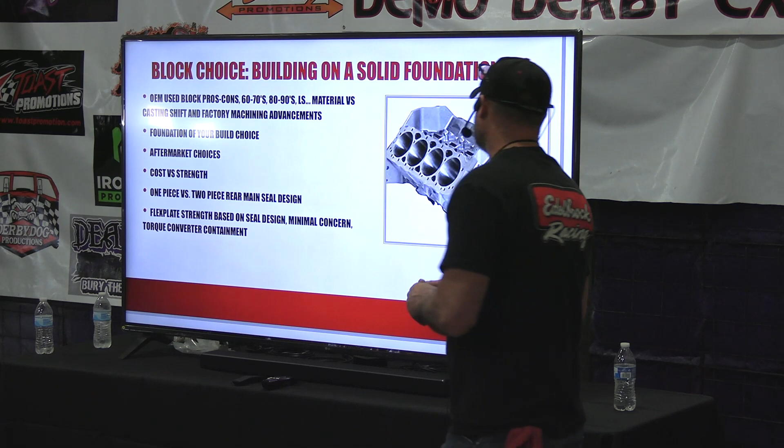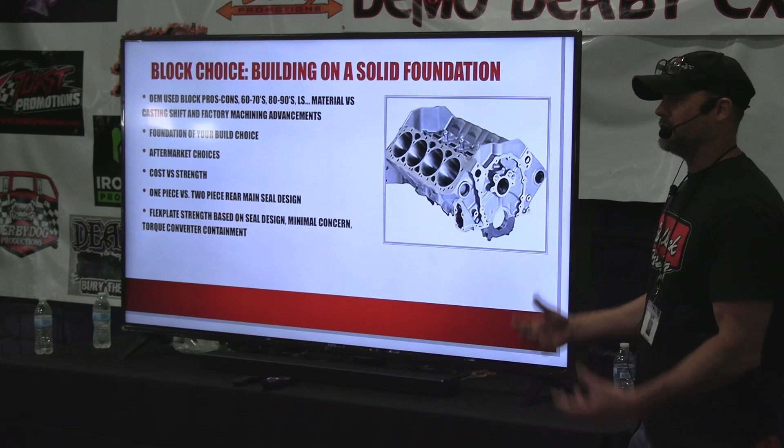When it comes time to build an engine, the block is going to be the foundation of everything. I hate to see a customer come to me with a very big idea of what they want to build, and then we put it all together with a block that's only worth about 50 cents. You built this enormous, beautiful house on the beach, and it's just going to wash away.

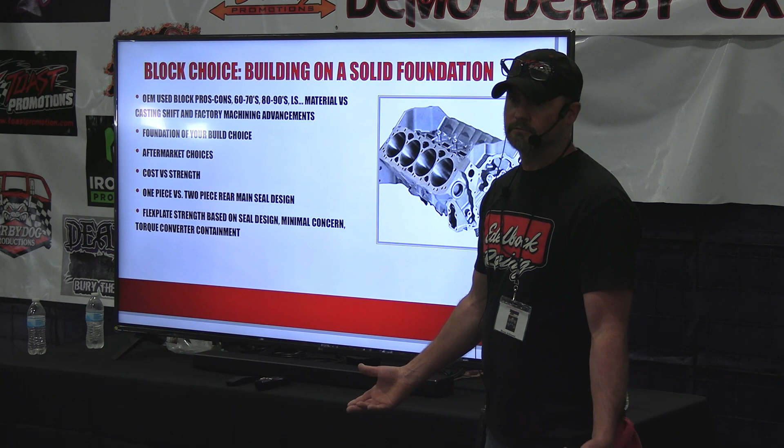So our choices on blocks, especially the OEM stuff, I want to start there. We've all heard the old iron's better—high nickel content, this, that, and the other. The reality is the 60s and 70s era blocks are definitely a denser and stronger material. There was some better material out there. They were seasoned, as they like to call it.

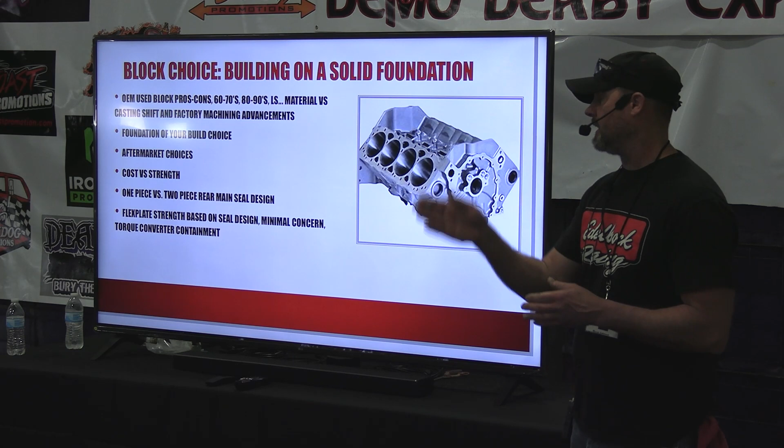The downside of those blocks is back then the technology for machining that material wasn't very good. So you can scour the salvage yards and find yourself that golden 010 block, but if you look down the cam tunnel, the core shift is horrible. So now we've got a block with really good material, but one side's considerably thicker than the other. Do we really want to start with that? Probably not. The machining back then just wasn't that great.

Now jumping into the 80s and 90s era—80s right-hand dipstick, 2-piece rear main seal blocks were absolutely horrible. That time frame, materials were very scarce. We were going through a weird economical switch, there wasn't a lot of money out there, manufacturing was much less. So the cast iron quality of those blocks is not very good at all, and the machining technology for that poor material still wasn't up to standard. Those blocks primarily will break much easier—they're very brittle. Now as we keep going into the 90s, things started to change a little bit.

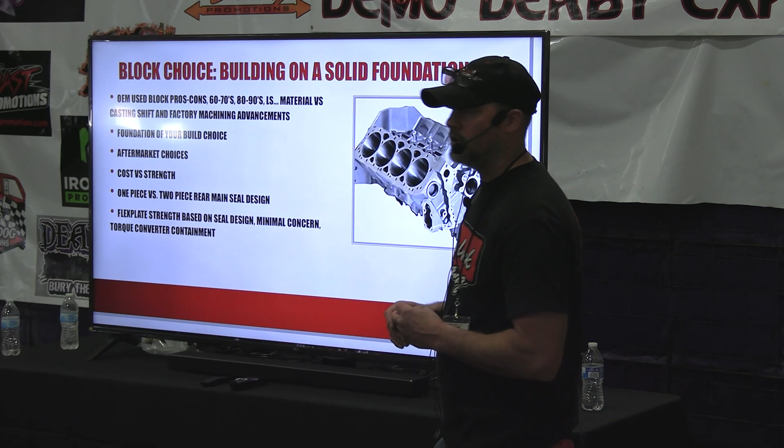So we jump into the 880 Vortec style blocks, the 638s, throttle body stuff, single piece rear main seal. If you take one of those blocks, the cast iron material is not as thick and strong. However, the machining process is by far better. If you take an 880 block and set it right next to an 010 cast iron block, you can visually see how much better the core shift is, how much more consistent the block is. The machining is just that much better because technology grew.

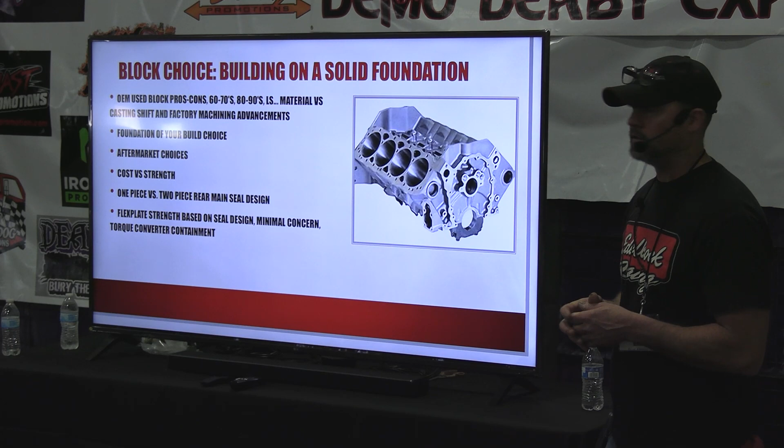Now, as that technology grew, manufacturers realized we're getting so good at building and machining these that we don't need to make them as thick or as strong. So that's the spin-off of the blocks, okay? The LS stuff—everybody's jumping on that. That's actually an absolutely fantastic package. The LS engines are really good, and their cast iron quality is about the same as what we're dealing with in the Vortec style stuff. Obviously, their weakness is the brittleness of the cylinders. So it's six of one, half a dozen of another.

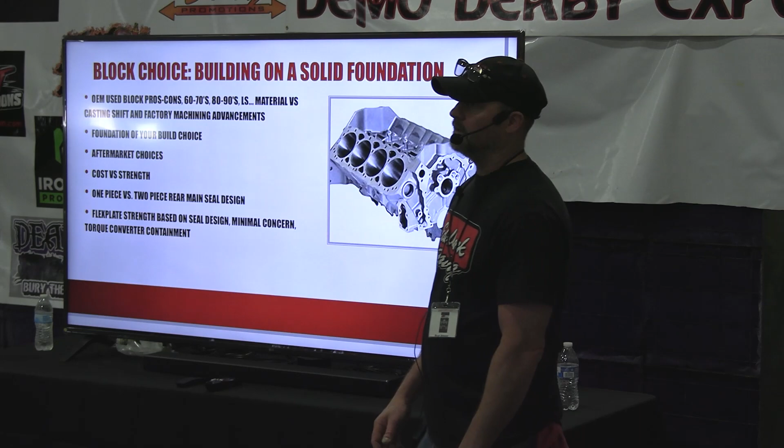Aftermarket stuff—the aftermarket world is huge with blocks right now, not just domestic, but there's a lot of China stuff coming over. The reality is the China stuff's actually pretty good. As much as I hate to say that, it's true. There's some manufacturing going on that's 100% mimicking a Dart SHP block with priority main oiling. The material seems to be very good, and the machining quality seems to be very good.

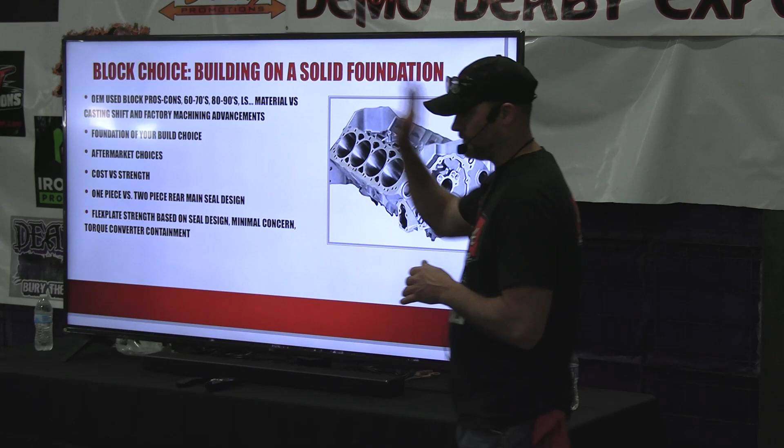I found a dealer located far out west, a very big warehouse I deal with, and the rep I typically talk to mentioned they had gotten a very large order of these Chinese blocks in—would I be interested? So I said, you know what, Tom, here's what we're going to do. Send me two of them. I don't know that I'm going to use them, but send me some.

I wanted to see, because if I buy just one, it might be easy enough for the guy to walk out in the warehouse and say that one looks to be the best. So I figured if he sends me two, at least I had two to compare. And the reality is it's actually pretty good stuff.

Dart and World are the two biggest ones as far as block strength. They are absolutely thicker in the deck, thicker in the cylinder bores, just stronger all around. The block itself is physically heavier. An average Dart block is right around 220 pounds, which is a lot for a bare block.

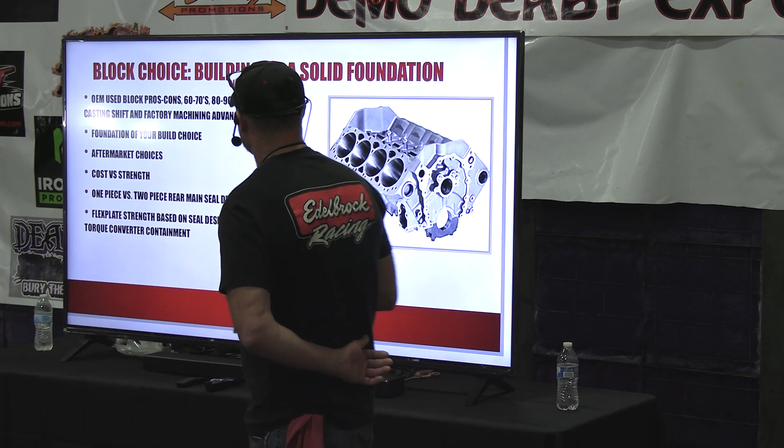Okay, the one-piece versus a two-piece rear main seal. I've had that question a lot with my guys. Really, in the block itself there's no big difference. But there is one small difference when it comes to a two-piece rear main design versus a single, and that is the strength of your flex plate.

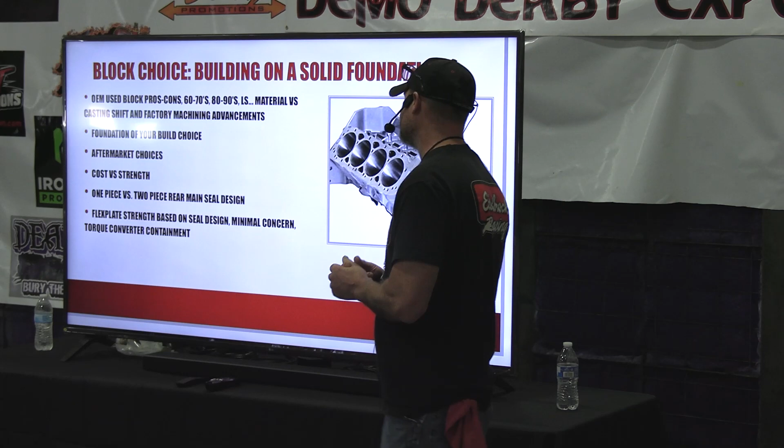I stress hardcore on that flex plate, because time and time again you're beating the front pump out of your transmission. Well, there's a reason for that. To contain your torque converter and hold it, it has to be seated against the crankshaft. The flex plate's the only thing that does that for you. That's why it's called a flex plate, it's just a big spring. So every time you back up and hit, the only thing holding that torque converter from slamming into the front pump on the transmission is that flex plate.

The one-piece or single-piece design crankshafts have a considerably smaller bolt flange. If any of you guys have run both designs before, you'll notice that. Being that flange diameter is smaller, that flex plate is slightly weaker than the older two-piece design. But other than that, in the blocks there's not really anything.

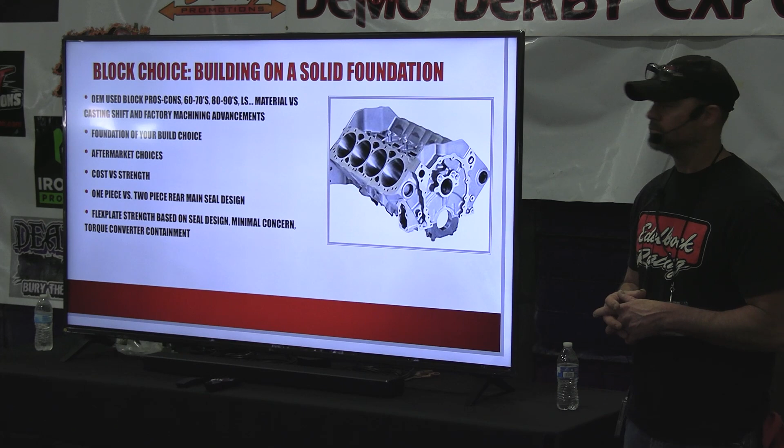Okay, all right, does size really matter? Everybody wants to build strokers, everybody says 'I want the biggest and baddest,' and when they show up, this thing's just going to tear everybody in half.

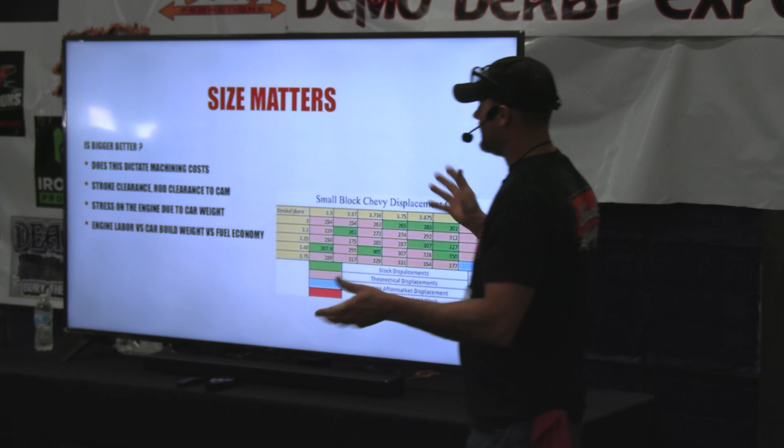There is actually some thought process to the size of your engines, and the big thing is it comes down to the weight and size of your build. If you're going to go build yourself a 9,000 pound car and then decide you're going to run 302 cubic inches, you can put all the gear to it in the world that you want, but the engine is going to labor. It is going to struggle to move that much weight.

You guys don't have race cars, but you do kind of have a drag car. You need to have that 10-foot shot, because that's about all you get most commonly. So you need to move the maximum amount of weight, which is your car, the fastest you can move it in 10 feet, to put on as much damage to that guy as possible.

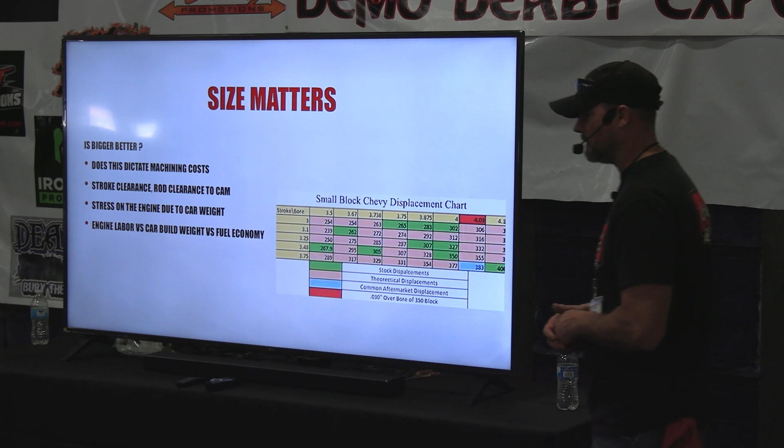So I always try to tell my folks that the size of the engine is going to be determined by what you build. My very first question with any new customer is, what kind of shows do you normally run, and what kind of car do you normally build? Are we talking a 4,000 pound car, or are we talking that 9,000 pound car? Because that's going to make a difference as far as what direction we want to go.

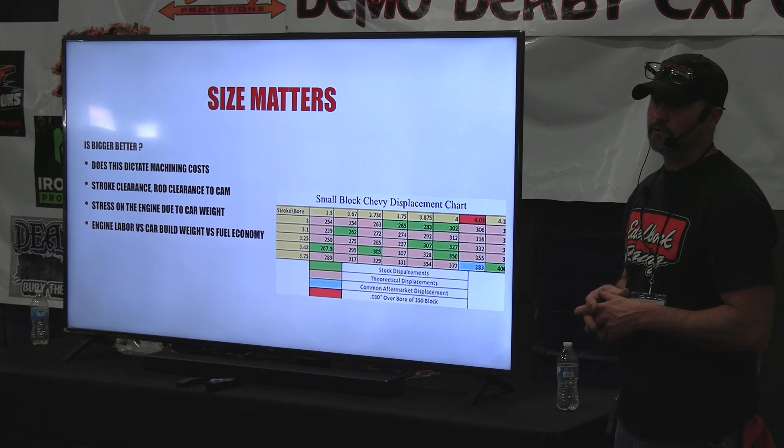Obviously, the more cubic inch we put in that car, the easier it's going to be on the engine as far as labor and stress, but it's also going to be able to move that much weight in a short distance. As far as machining costs, of course there is. Anytime we're going to go bigger on cubic inch, especially stroking an engine, there are machining costs. There's a lot that has to be done to the block for the rods to swing through, and a lot of work needed on the rods themselves in order for the camshaft to fit.

I think I covered the car weight. Okay, yeah, let's just go to the next slide.

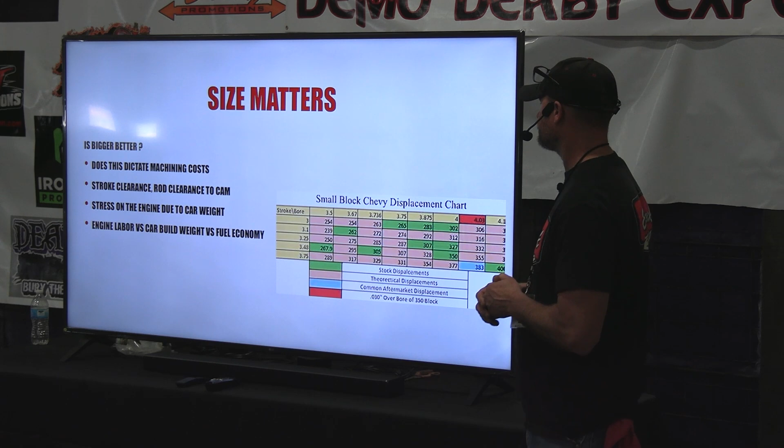All right, keeping it all together. I get this a lot too — steel crankshafts, cast crankshafts. For the most part in the Derby world, you guys do turn RPM. That's absolutely true, but you also only turn RPM in a very short burst.

Even a drag car turning an 8-second quarter mile turns a lot of RPM for 8 seconds. You guys too can turn a lot of RPM for, let's say, 5 to 8 seconds most commonly. So materials of our rotating assembly — we got steel and we got cast crankshafts, and then we have this voodoo stuff called nodular iron, which is still cast.

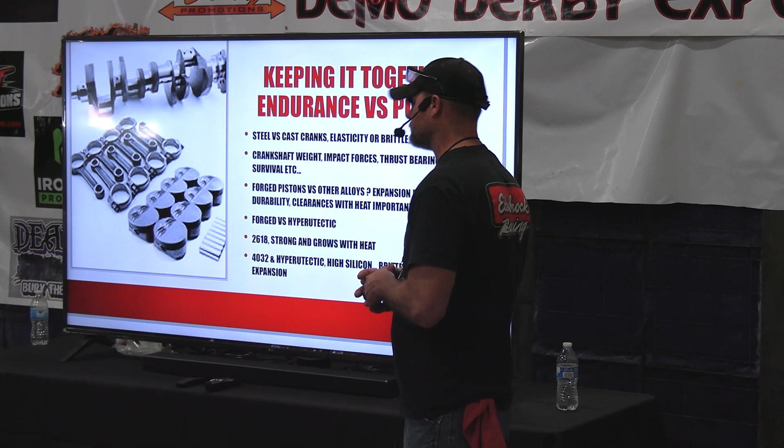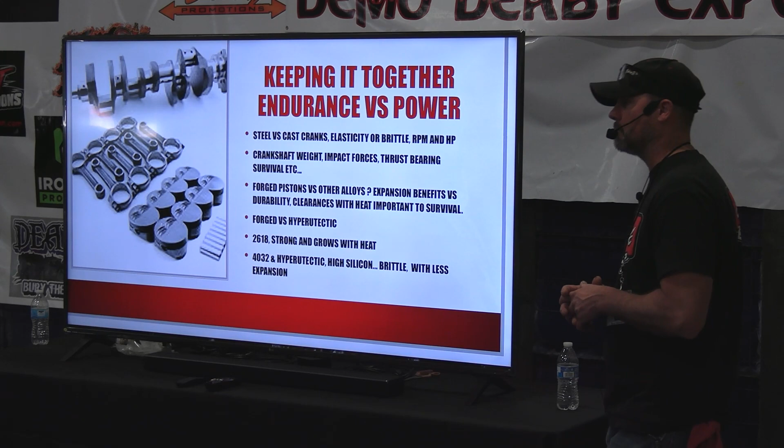Steel crankshafts are obviously extremely strong, but they're also elastic. Steel can flex and bend, and it can take that hard shot without breaking. Now, true enough, they will break at some point, but they have elasticity in them. Cast iron does not. Cast iron is a very hard but brittle material, very similar to a file.

That cast iron crankshaft can break before it will ever bend. So in the event that you get that unlucky shot and you're nosed up hardcore, and there's your damper sticking out plain as day—you can't see it because you're nosed up—and you go put a hit on that guy, and that damper becomes your front bumper to make solid contact, that cast iron crankshaft is going to break in half. It is absolutely going to break in half.

The steel crank may flex and bend a little bit and not break, but it's also going to take on damage. The difference between the two is you hurt the crankshaft with the steel. When you broke the cast crankshaft, it took everything else with it. So that's something to consider.

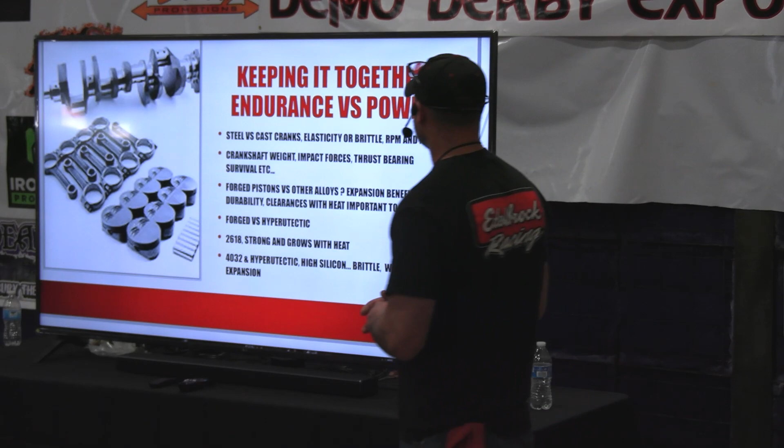Impact forces on your rotating assembly. Thrust bearings are big. Every time you move forward and put on a hit, the car stops, but the crankshaft tries to keep going. The only thing that holds that crankshaft in the block is the thrust bearing. Now you're going to back up and take on a hit—car stops, crankshaft tries to keep going. So the thrust bearing in your engine gets beat and beat and beat. A lot of times when I get engines back, one of the very first things I want to look at is the end play of that crankshaft. And that's going to tell me how much damage the crankshaft took.

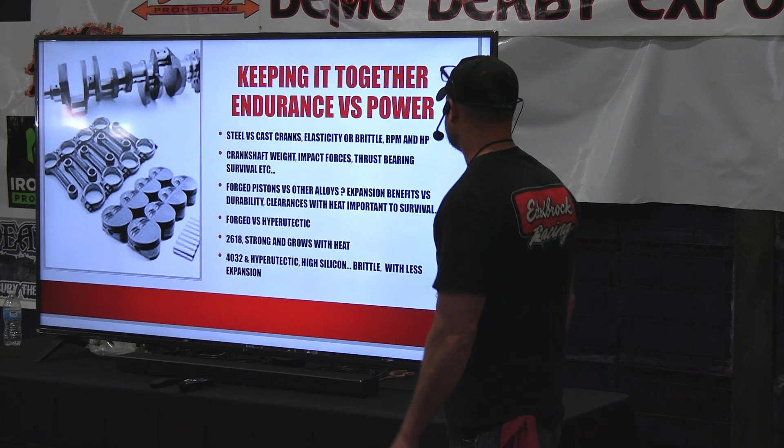Forged pistons versus other alloys. Basically we've got forged, cast aluminum, and hypereutectic. Forged materials, you're going to deal with 2618s or 4032. 4032 has very similar characteristics to hypereutectic, so we'll just kind of call those the same. A forged piston is extremely strong, but it grows and grows and grows when it takes on heat. There's not a lot of silicon in them at all, so the clearances for that piston need to be extremely large if you're running on gas and you plan on getting hot.

Fortunately, I was really happy to listen in on Jason's. With alcohol, it's a little different because that alcohol is helping to cool the head of that piston. If we're on gas, that forged piston is going to grow a lot, and as it grows it'll finally run itself out of room and start dragging on the cylinder wall, which creates even more heat, and it's just a snowball effect until that piston decides, I'm done, I can't do this anymore. So now we look at the 4032 material and hypereutectic.

They have a lot of silicon content in them, which completely controls—well, let me not say that—really helps control expansion. A hypereutectic piston, if you were to put it in the oven and warm that baby up, throw a mic on it, take it out and put it in the freezer and cool it all the way down, the expansion and contraction rate of that piston is very, very minimal. So when it comes to heat, it's not so much a concern of the growth of the skirt of that piston.

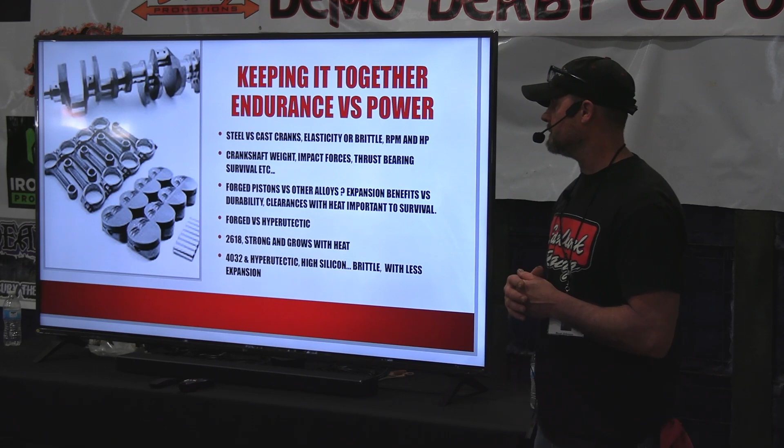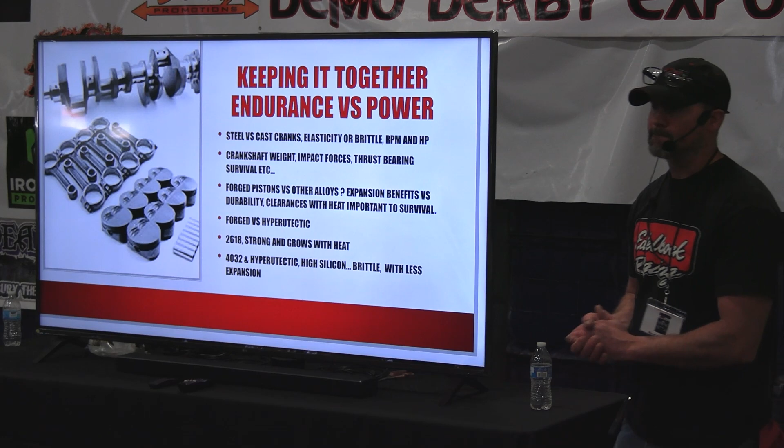We run into a very serious detonation problem. We get a piece of debris that gets into the combustion chamber somehow—our air cleaner got knocked off 5 minutes ago and we're out there running hard, and something comes down through the carburetor and you're wide open. It makes its way to the combustion chamber, it crashes into that hypereutectic piston, and it will literally explode that piston like glass. So that's something to think about too.

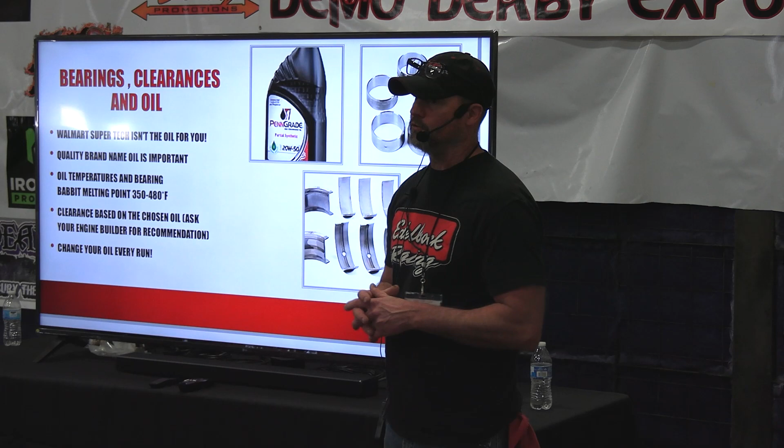All right, bearings, clearances, and oil. I absolutely have to agree with Mr. Koch—oil is huge, oil is super, super, super big for you guys. That SuperTech Walmart stuff is not the oil that you need to even come near. Anything like that, we don't want to do anything with that type of oil. The oil is absolutely the lifeblood of your engine.

A quality oil, name brand, is the direction I always push my guys. Synthetic-based oils are fantastic. Does anybody actually know the difference between synthetic and conventional oil?

The myth has always been that synthetic-based oil is man-made and standard oil is crude oil. Well, they're actually both start out as crude oil.

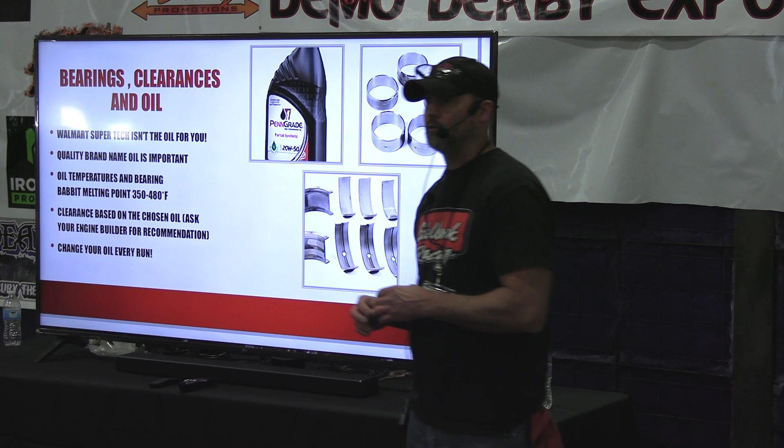There's molecules that make up the oil. In standard crude, the molecules are multiple different sizes - big ones, little ones, even smaller ones, and medium-sized ones. So when they flow to fill those gaps and clearances, the big ones can't fit into the really small areas, but the small ones can.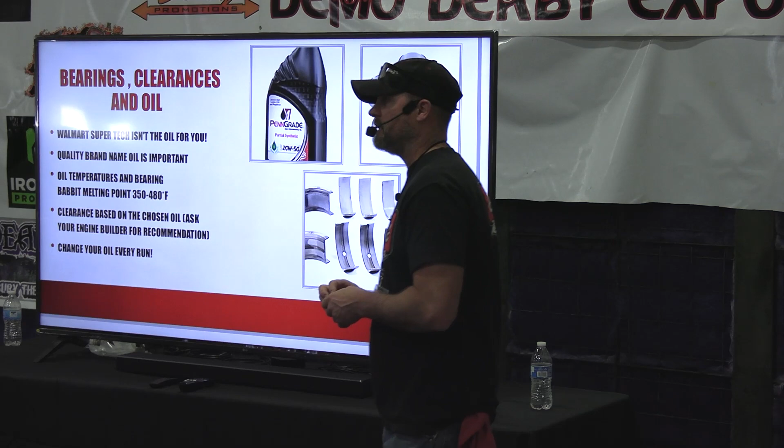With synthetic, man does go in and change that. They go in and find the smallest ones and pull them all out and put them in one jug. Now that's a synthetic-based oil. It has basically been screened down to get the good stuff.

Our clearances are going to come into play whenever we decide what weight or body of oil we're going to use. That's something I tell everybody - talk to your engine builder. That particular person knows what clearances they want to run based on what oil they want you to run. Obviously, that oil is not just a lubricator, but it's also a shock absorber.

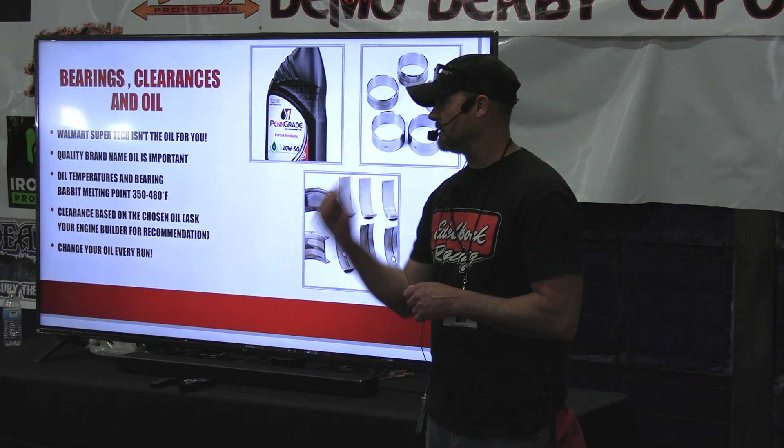There's that very, very thin layer between the crankshaft journals and that bearing. The only thing that keeps that bearing from making contact with that crankshaft is that thin layer of oil. So it becomes a shock absorber. Anytime that bearing makes contact with the crankshaft, it's like taking a piece of steel and a ball-peen hammer - you hit that piece of steel in the middle enough times, that flat piece of steel just starts to bend. Your bearings do the exact same thing. Our oil is the only thing that can protect that.

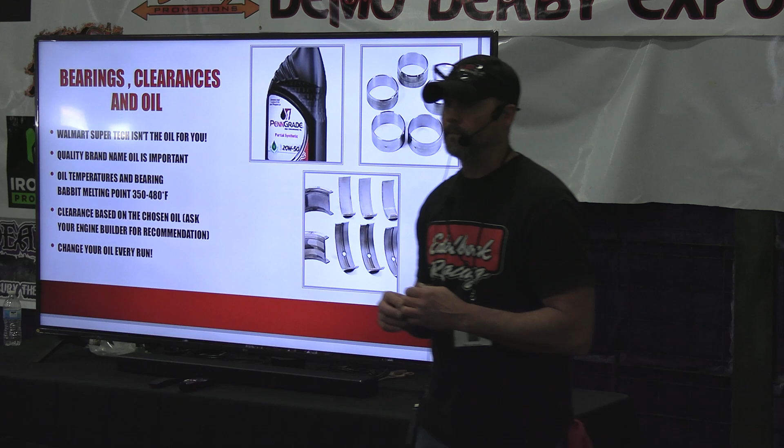Temperatures and bearing babbitt - depending on the type of material your bearings are made out of, anywhere from 350 degrees to 480 degrees, that babbitt will melt like solder. It will literally melt itself right off of the bearing and puddle up in the bottom of the oil pan. The next time you bring that engine back to me or your other engine builder and they pop the oil pan off, it looks like somebody just took a big roll of solder, melted it, and dropped it in there.

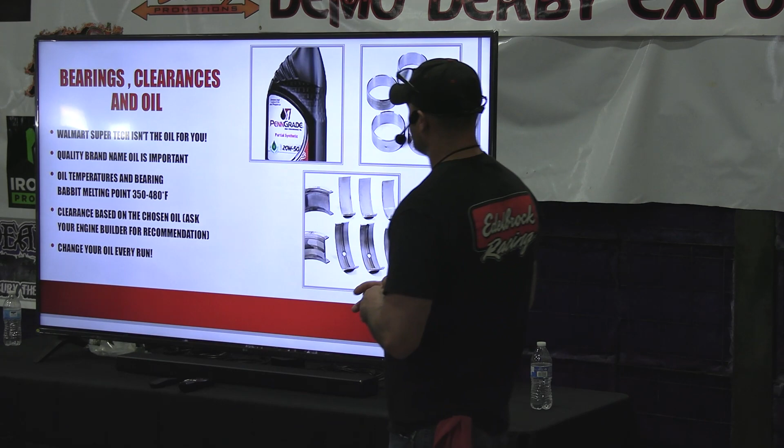And that's all due to the oil temperature. So bearing material is very, very important. Again, clearances and the bearing material - that's something you need to talk to your engine builder about.

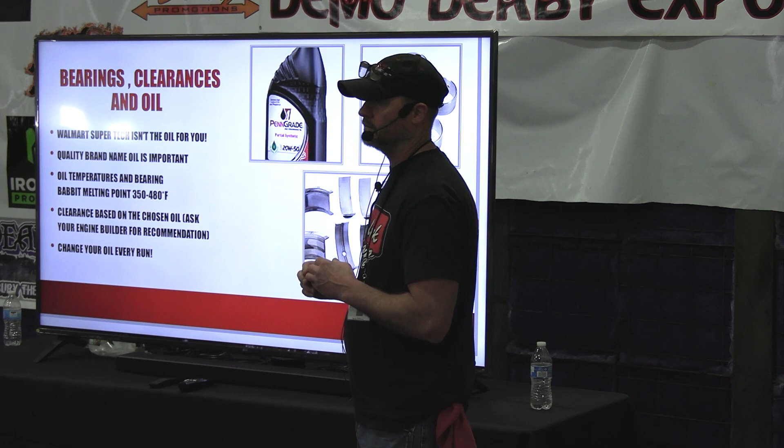Change your oil every single run. Every single run. That oil is a lubricator, it's a shock absorber, and it's a cleaner. And it's a fantastic diagnostic tool. You've invested a lot of money into your engines. You're going out there, you're running. You're in a dirty environment. Your air cleaners don't seal that good. You're taking on heat, you're beating it. That oil is going to protect it. Change your oil every single run.

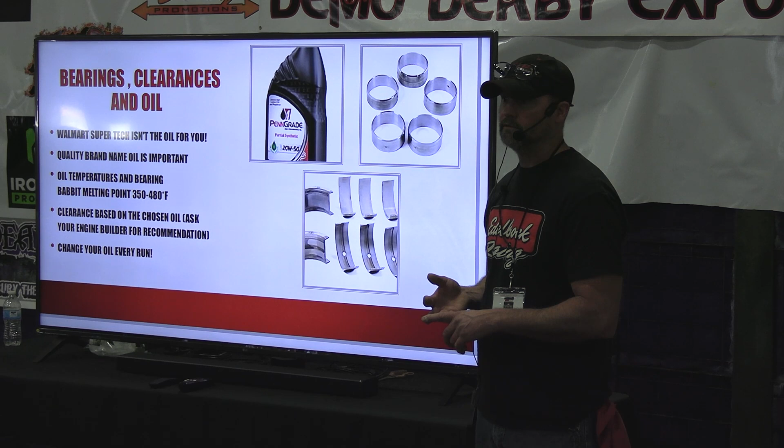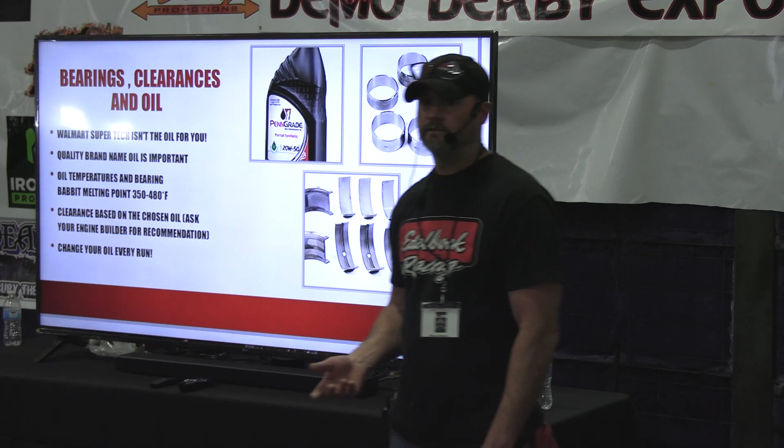Check that oil. Look at it. Put it in a clear container so you can see it. Don't just dump it into the same old dirty jug that was in the corner of the garage that I've changed oil for years with. Look at your oil - it's going to tell you things.

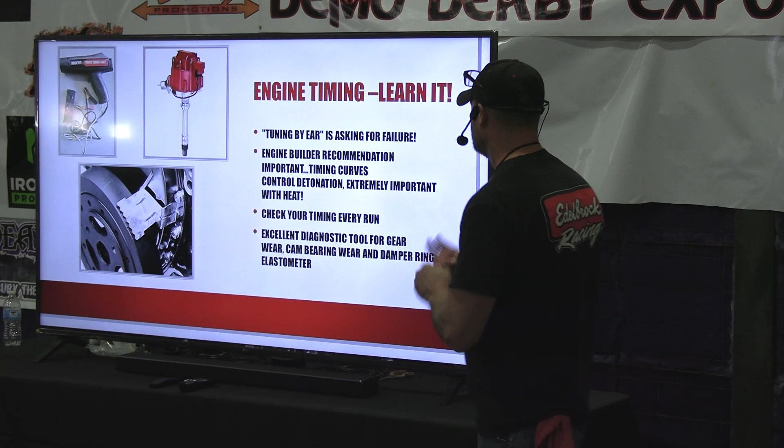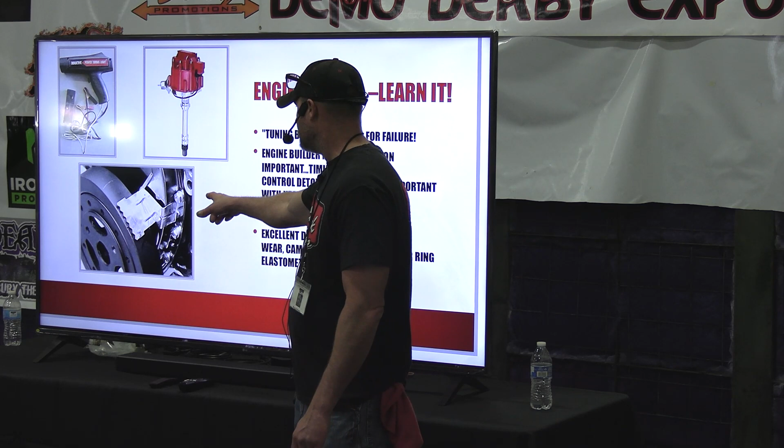Check your timing every single run. If you do, you can use it as a diagnostic tool. If your timing's starting to fall off, and you know the distributor didn't turn, then something inside the engine's starting to fail. We've either got a cam gear that's starting to get chewed off, the distributor gear getting chewed off, or maybe the elastomer ring on the damper took a good shot, and now that rubber ring is about ready to let that entire cast iron ring chuck right through the radiator. So you can check that with your timing.

Cam bearing wear — if you got it super hot and those cam bearings are melting down like solder, now the camshaft has a whole lot of play in it, the timing chain has a whole lot of play in it, and your engine timing as far as ignition is going to change. So that timing is huge. You need to check it every run.

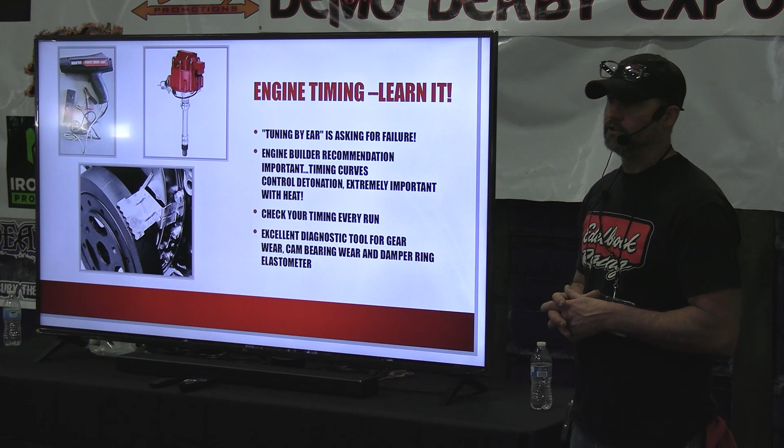Fuel system — I 100% agree. Filter, filter, filter, filter. Keep it clean, super clean. That fuel system is so incredibly important to you guys. Make sure your fuel lines are clean.

Anytime you cut that rubber hose, or even just remove the hose and push it back over a barb fitting, you are pushing those little fine pieces of rubber hose right inside of that fitting, and trust me, they will find their way to the needle and seat at exactly the moment you don't want it to happen — when you're out there and you're just about to win. We're down to 2 cars and I've got this guy, and that little piece of rubber you didn't even realize you shoved in there finds its way to the needle and seat, shuts you down, and it will not restart. That's the worst feeling in the world.

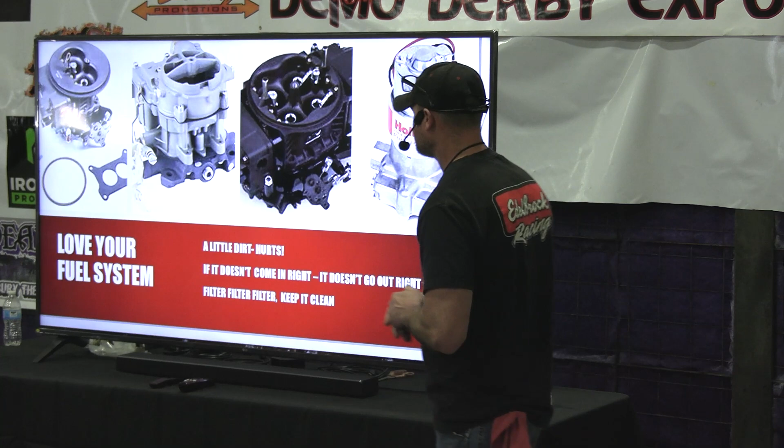So keep everything clean. Keep those air bleeds cleaned out every single run. Keep your carburetor outside clean. If it looks filthy dirty on the outside, trust me, it's also dirty on the inside. Keep it clean. All right, let's move on.

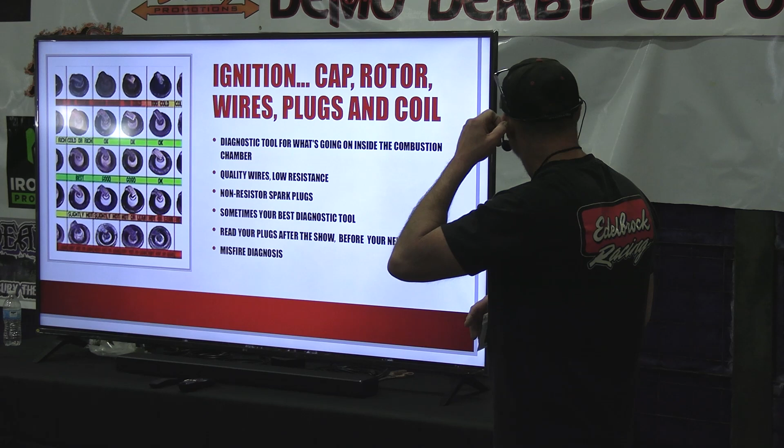Your ignition system — cap, rotor, wires, plugs, and coil. This chart Casey found online, I strongly recommend you guys find anything like this that's going to show you diagnostics of a spark plug, because that spark plug is definitely going to tell you what's going on inside that combustion chamber — whether we're too fat on fuel, too lean on fuel, do I got an oiling problem, do I got a mechanical problem.

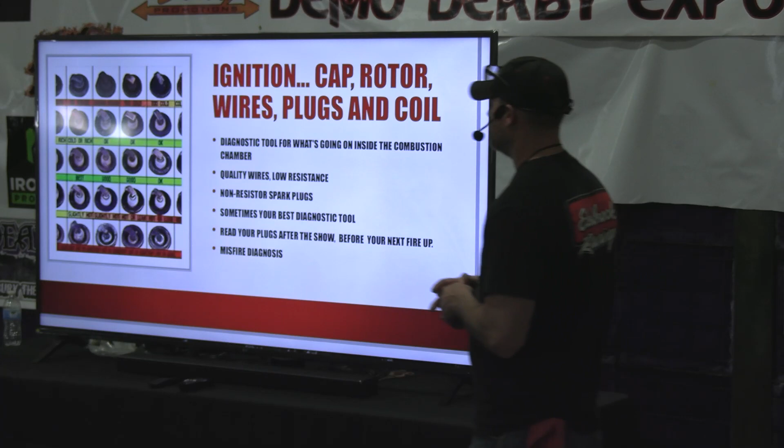You can read those spark plugs to kind of tell what's going on inside your engine before it fails. Quality wires: please don't run out to Napa and just tell them, hey, I need a set of spark plug wires for a '75 Chevy pickup. Those will work — well, they won't work, they will run, but that graphite style wire is very, very high resistance. The outside insulation on those style wires is pretty flimsy, and eventually you're going to run into all kinds of misfire problems. Get your hands on a quality, good spiral wound wire that's low resistance, has good insulation characteristics, and that'll help your spark plug diagnosis quite a bit as well.

Non-resistor spark plugs are what I've always recommended. Don't just run right out and grab yourself a set of AC Delcos for a small block Chevy or a small block Ford or whatever it is you run. Get a good quality non-resistor spark plug. We want the spark to jump the gap — that's the point. We don't want any kind of resistance to keep it from doing that. So again, find a good brand name — NGK, Autolite, whatever your engine builder's particular lovable brand is — but just make sure they're a non-resistor design.

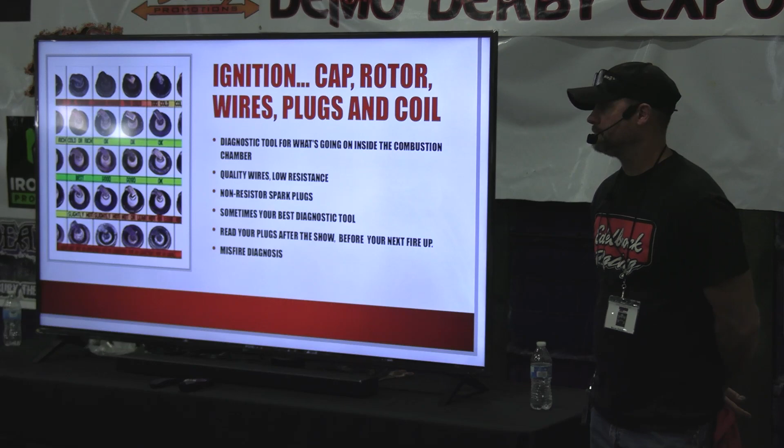Read your spark plugs after the show. You guys are building your cars, pulling it in and out of the garage, riding around out in the field, long before you ever get to a show. So if you were to try to check your spark plugs right there as a diagnostic tool to see where we're at on fuel, it's not going to tell you anything. After you make that run, when it's actually been out there in battle, that's when your spark plugs are going to tell you what's going on inside of there — because that's when you got it super hot, that's when you ran into a weird miss, whatever the case may be. At that point, you need to read your spark plugs.

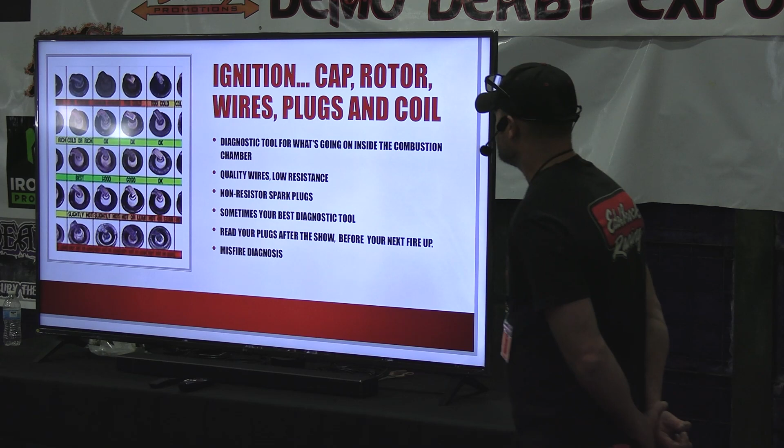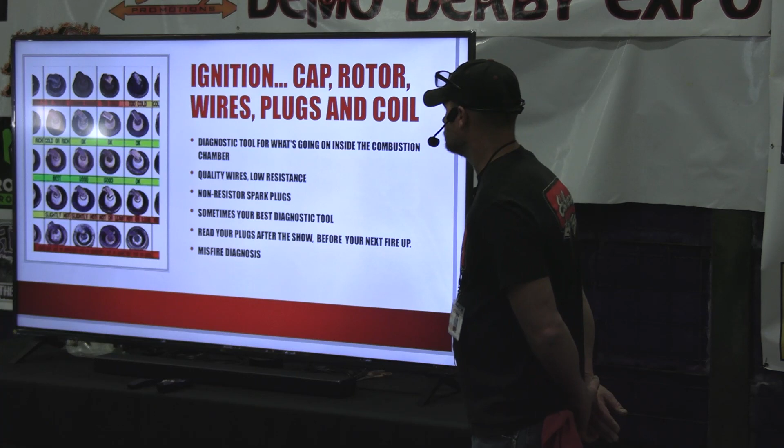Misfires are an absolute engine killer for a couple different reasons, but diagnosing them isn't that difficult sometimes. Everybody's got headers on their car — there's a tube to each exhaust port. If you have got a dead cylinder or a misfire, find the coolest tube. Chances are that's the cylinder that's having the problem.

Start going through it mechanically. Does everything look mechanically okay, or when I took the spark plug out of that hole, is there oil everywhere? Then break it down — is it an ignition problem? Is my spark plug okay? Is my wire okay? Now look at the cap. When it comes to the coil and the rotor, that's not going to be a single cylinder misfire — those components are involved with every other cylinder. So you can pinpoint it down to one cylinder with the wire and the spark plug. If your distributor cap gets cracked, don't repair it with JB Weld.

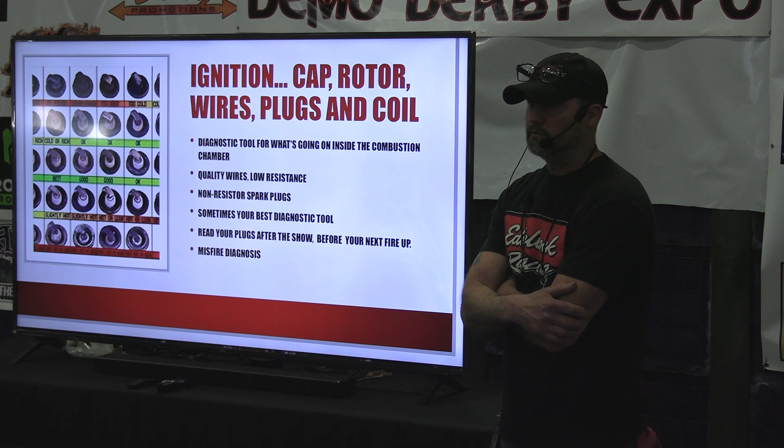Go get a new distributor cap. Don't seal it up with some RTV silicone and think that'll be fine. It won't. Go get a new distributor cap. Okay.

Cooling system. Single pass and double pass radiators. Double pass radiators are actually worth it. They're slightly more expensive, hose routing is a little weird on some of the cars, but they are actually worth it.

Fan choices. Airflow through that radiator is very, very important to keep it cool. Shrouding is a big thing.

I have clients that I hand them their engine, they take them home, they put them in their car, their build is done, they call me, I'm ready to go, come tune it for me. I show up, they've got a brand new double pass radiator in their car, they've got this nice 6-blade flexible fan on there in case it takes a shot. And then there's absolutely nothing between that fan and the radiator for 18 inches. The fan's not doing anything for you.

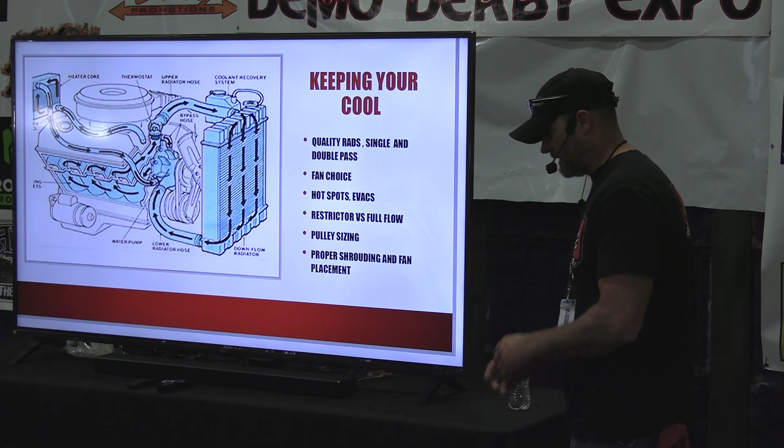It's doing absolutely nothing. You have to put together some kind of a shroud and make that fan pull the air through it. A lot of guys are using these politician signs, whatever that stuff is. I know a couple of my guys that have done some really smart things with shrouding that I never would have thought of.

They go get a Rubbermaid big garbage can. They're rubbery and flexible. And then they cut it to the length they want and the size of their fan, and then they run it to the radiator. So it's flexible, it can take a shot without destroying the radiator or the fan. So that works pretty well.

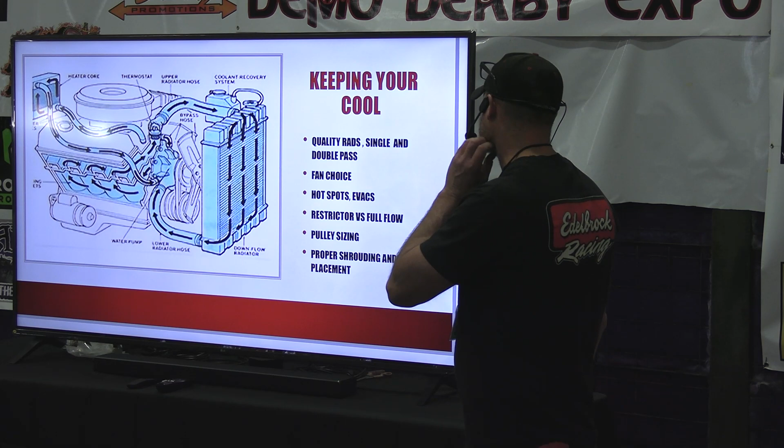Hot spots and evacs. I really, really like to get rid of hot spots in the engine. Now, obviously, hot spots and evacs only work when you still have water. Once you lose water, the whole thing's hot. But on a typical small block Chevy, the center exhaust ports are side by side, so therefore they're going to be the hottest area of your engine.

I'm sure everybody in here has blown a head gasket on a small block Chevy out there derbying at some point. When that head gasket lets go and you tear it apart, directly between the center two cylinders, 3, 5, 4, and 6, is where your head gasket let go. That's because that is the absolute hottest area of that cylinder head.

So I like to evac that water out of there. Let's not allow a hot spot to get there. If we evac that water, it does help cool because we have fresh coolant going to that location, but it's only good as long as you have water. Okay.

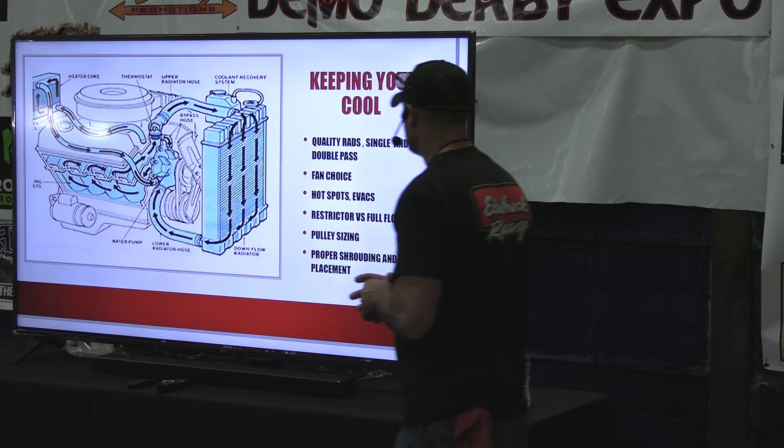Pulley size. We want to try to run, or I highly recommend running 1-to-1 on your pulleys. And no restrictors.

So, years ago I contacted Stewart Water Systems. They're very, very big in racing, very, very big in cooling. They probably build the best water pumps that I've ever seen. And I talked to one of their engineers for a long, long time about pulley sizing, about fans, about restrictors, coolant flow, and he taught me a lot.

About pulley sizing - we want that fan spinning with the water pump the same RPM as the crankshaft, 1-to-1. We don't want to overdrive it, we don't want to underdrive it, unless we want to build heat.

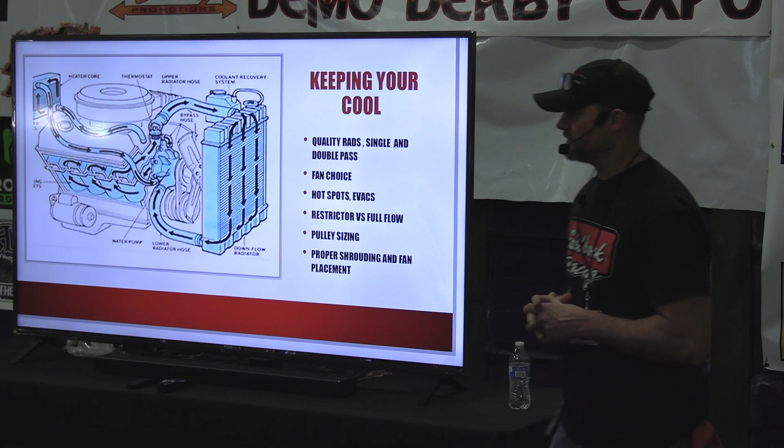A restrictor is designed to slow the coolant flow down to build heat, not to keep the water in the radiator longer to help it cool longer, because just as long as it's in the radiator, it's in the block warming up. So if we slow it down, yes, it's going to be in the radiator longer to have more cooling effect, but it's also in the block longer to have more heat effect. So you didn't win anything.

Okay? We already covered the shrouding. Is there anything else I'm missing?

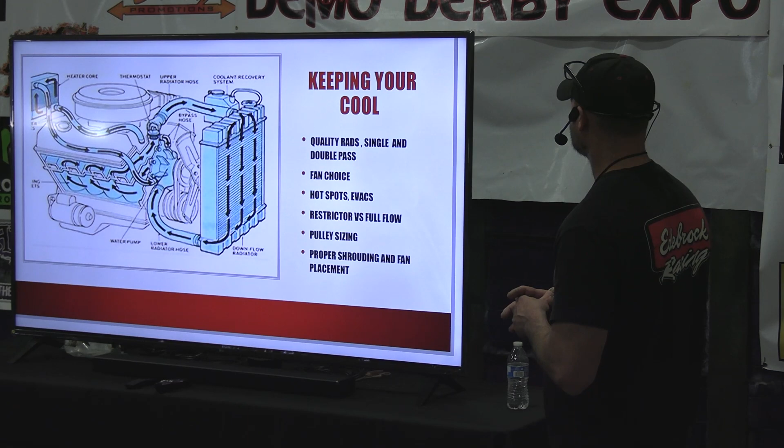Okay, you guys got any questions? None? Easy crowd, that's good. No, yeah, you killed it. All right, that's it, guys. Thanks.